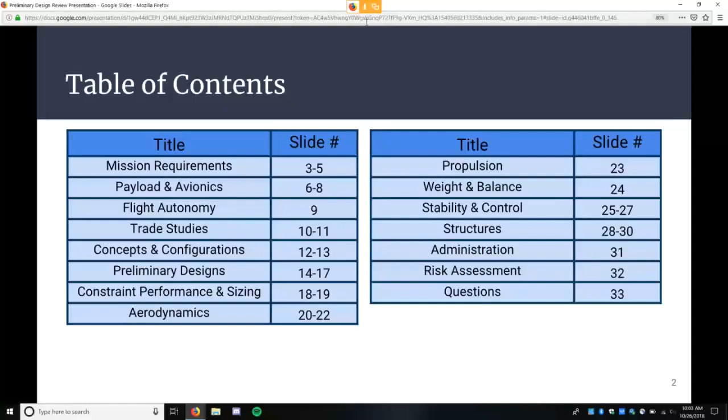Just a quick overview of our mission again. We are going to be doing air quality testing.

Our primary stakeholder is the Department of Ecology for the state of Washington. They want us to be collecting data on carbon monoxide, nitrogen dioxide, ozone, sulfur dioxide, and particle pollution in the boundary layer, which is between 300 and 3,000 feet.

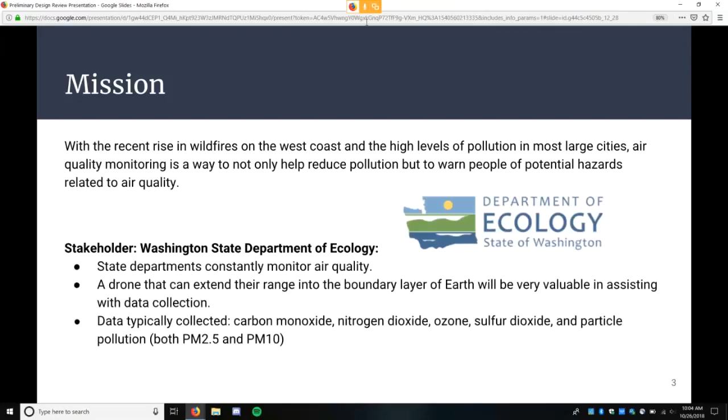Some concerns from last time that we need to address: more information was wanted on payload, range, altitude, and sizing for our drone. All these specific values will be addressed in the rest of the presentation.

Our budget has been elaborated on to cover the entire project instead of just our payload. Our Gantt chart was said to not have enough information, so we've added multiple steps such as modeling, prototype, and testing.

There were questions as to why we chose certain values for speed and range, and those will also be addressed in this presentation. It was recommended that we create a section for safety engineering.

While we don't have a specific person appointed to this role, each person on the team has safety in mind with their designs. For example, some configurations we've been exploring we have chosen not to do from a safety standpoint. We were also questioned as to why we weren't doing autonomous takeoff and landing, and I'm sorry if we did not make this clear, but we do plan on doing that.

So, finalized design requirements: we will be collecting the main data that the Department of Ecology wants, which is carbon monoxide, ozone, and PM2.5, which is particulate matter under 2.5 microns.

They want this data between 300 and 3,000 feet above the ground, so we will have a hand-launched takeoff, a flight time of 1 hour, 2,500 feet with a max ceiling of 3,000, and a belly landing.

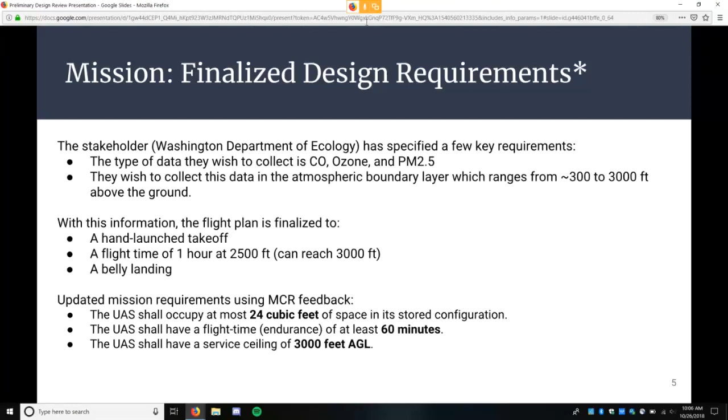A few driving requirements are obviously the hour flight time and 3,000 feet, but also the UAS shall only occupy 24 cubic feet. Right now it only occupies about 17.2 cubic feet with our design, so we are doing well in that aspect.

Our payload, this is our standard flight control stuff here with Pixhawk, pitot tube, GPS, telemetry information to transmit our data, and servos. Right now the cost of this is about a little under $600 with a weight of 90 grams.

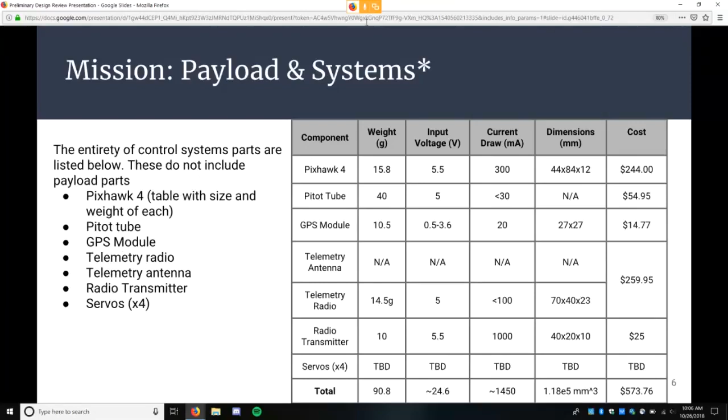We expect this weight to increase a little bit due to the servos not being chosen yet, because we cannot choose those until we have our control surfaces completely defined, but it will not increase a lot.

Avionics, this will be what we will be using to collect our data. We will have an Arduino Uno with a shield, a carbon monoxide gas sensor, an ozone gas sensor, a PM2.5 air quality sensor, and cables to connect them all.

The weight's going to be about 150 grams, and the cost is a little under $150. This aspect will not change at all.

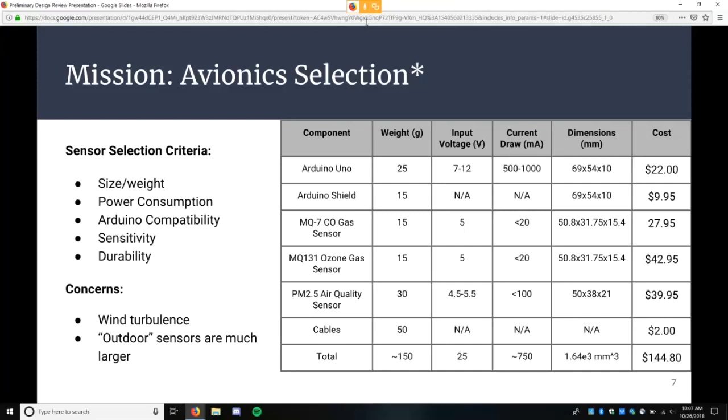The ozone sensor and carbon monoxide sensors are attached via an I2C connection, and the PM2.5 sensor will connect straight into the Arduino. This is just a little diagram of how everything's going to connect together, with some pictures of our sensors and Pixhawk.

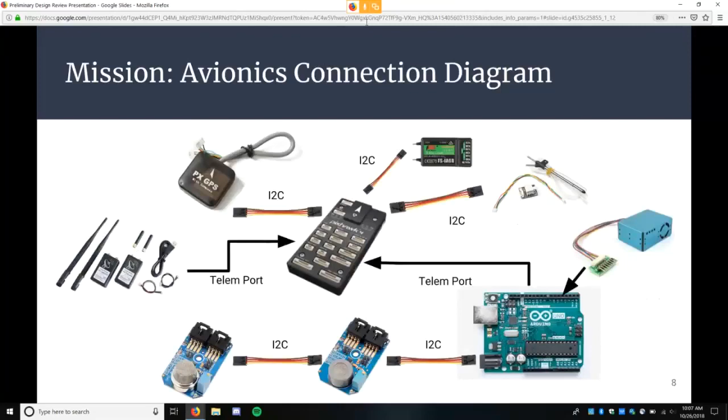We also plan on implementing flight autonomy into this mission. We want to make a flight mode that bases the aircraft's route on the data it collects. So, for example, it will fly in a certain pattern and collect data, and as this data is collected, it will move towards a higher or lower concentration of ozone, PM2.5, or carbon monoxide.

This will really help with data collection for our stakeholder for events such as the wildfire events that happened this past summer. So that was a big point for them—they really want to be able to test air from the smoke coming from that.

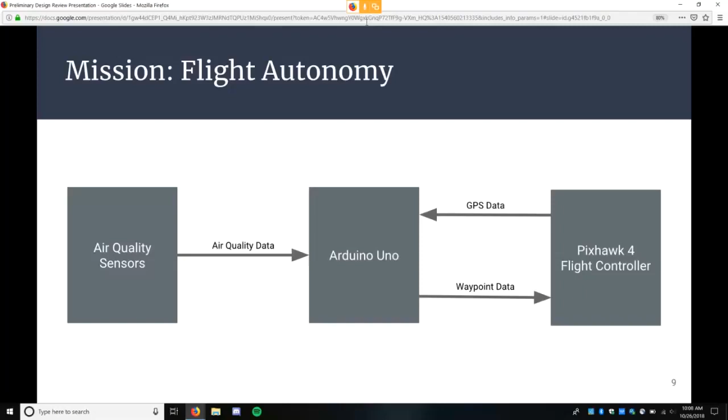Good morning, everyone. My name is Will Reithman, and I'm talking from Clemson University. I am the CAD and manufacturing lead for our team.

The way we did this, each parameter was increased while holding the remainders constant, and then we determined the effects that occurred from that change to ultimately size our aircraft correctly. The goal here was to find the parameter that had the biggest impact on the aircraft size, and then to optimize those parameters.

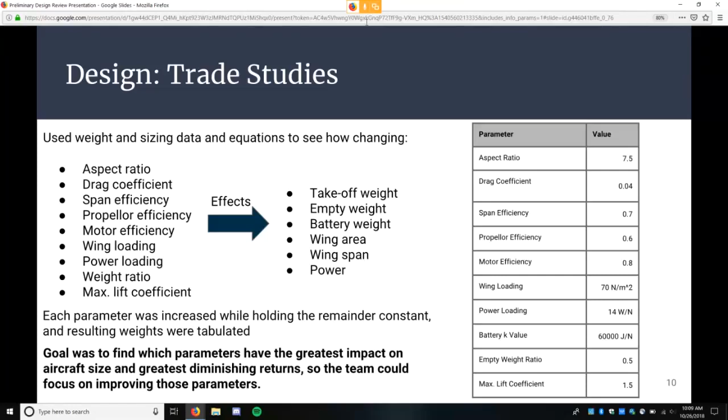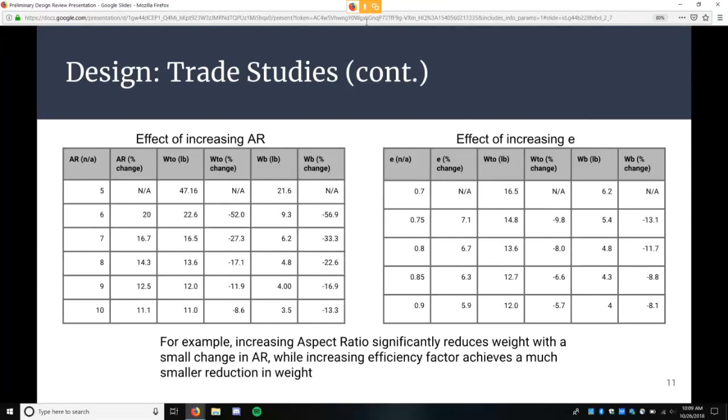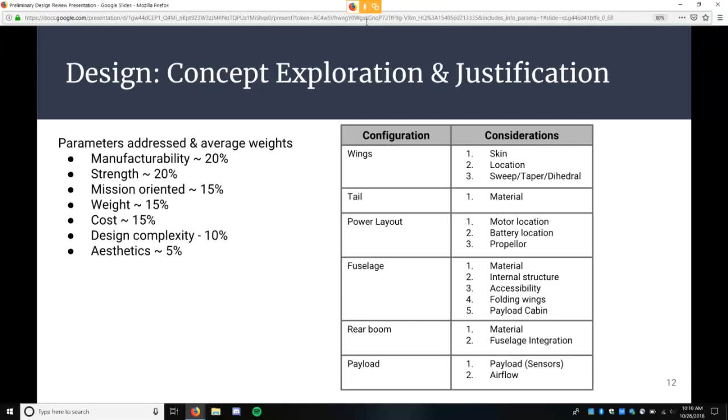So the team started exploring different possible configurations of the UAV in order to find the feasible configurations. The main parameters that we used to assess these concepts were weighted in order to determine which parameters took precedence over the others. These parameters and their average weights are shown on the left here, and then the different configurations and the considerations that we went through are shown on the table on the right here.

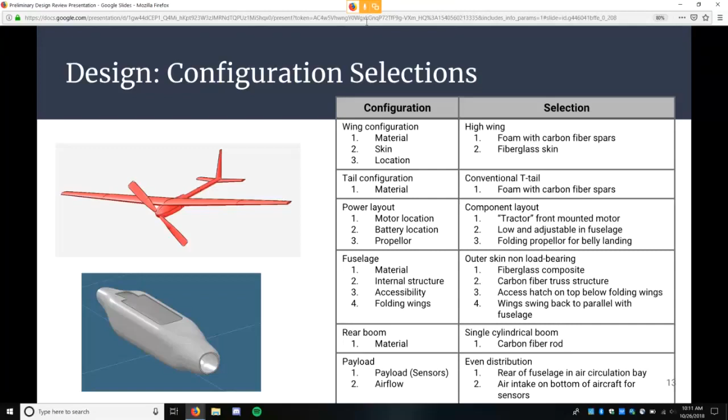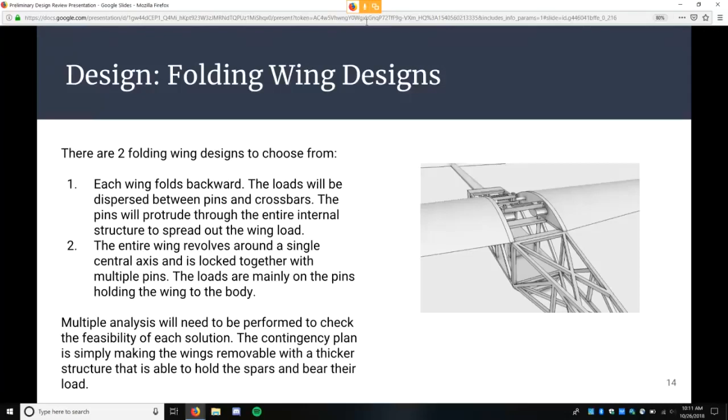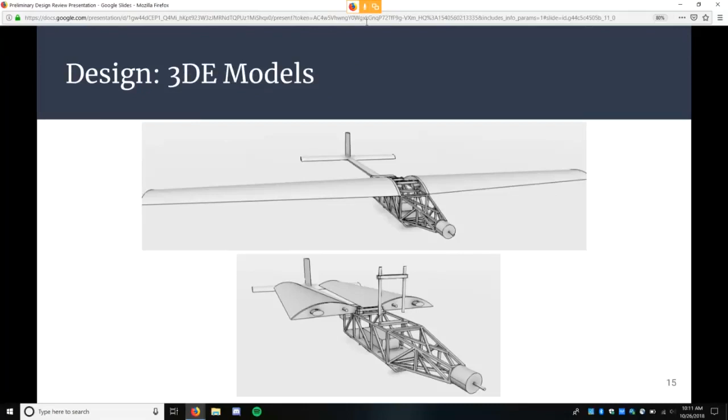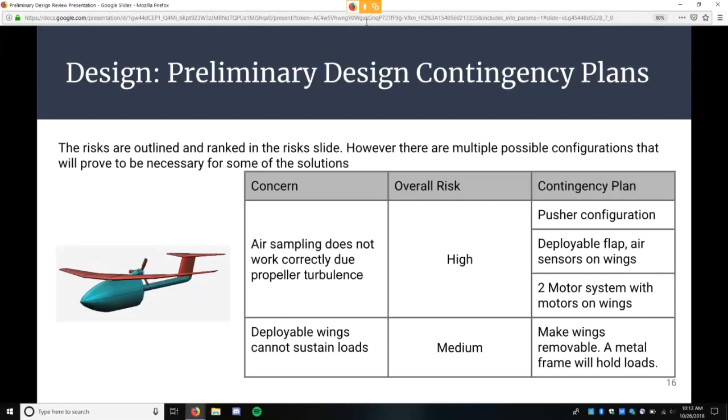So for our initial constraint, performance and sizing, we had an initial weight estimate, a takeoff weight of 13 pounds. And we were able to update this estimate once we found our finalized wing size, the materials that we were going to use, the volume of our structure and fuselage, the propulsion components, and the controls weight. So we have a new improved weight estimate of a takeoff weight of 10.72 pounds.

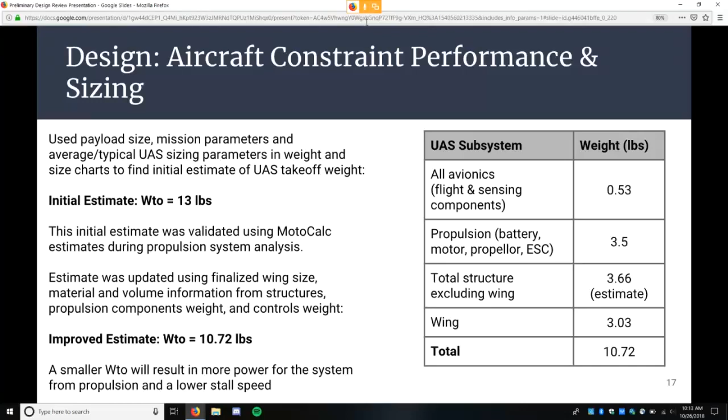And this lower weight will result in more power for the system from propulsion as well as a lower stall speed. And the table on the right here shows the different subsystems and their corresponding weights, with the largest being the battery, the total structure, and then the wings, which will add up to the total weight of 10.72 pounds.

Here's just our preliminary flight envelope for our aircraft. We will definitely need to do more testing with this as our design becomes finalized, but this is what we have right now.

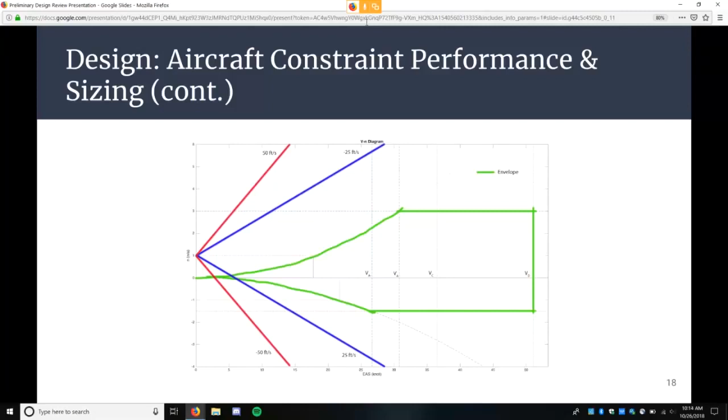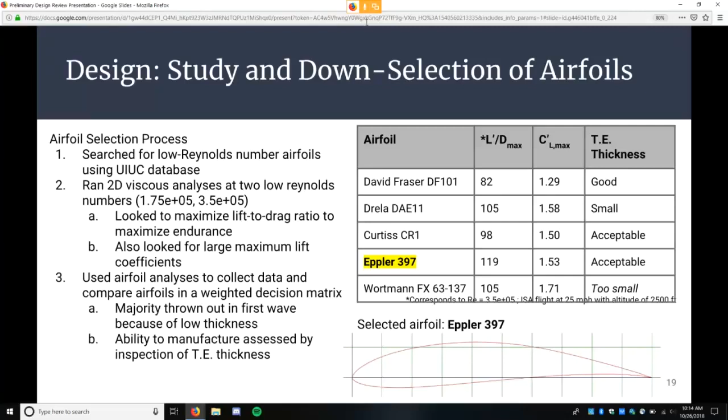We're going to talk about our selection of airfoils now. We had about 8 airfoils that we chose because they all had low Reynolds numbers, which is going to help us increase our flight time. And from those 8, we threw them in a decision matrix. And the main thing we were looking at was lift to drag ratio, and we picked the Eppler 397 because it has the highest lift to drag and also pretty high CL max and acceptable thickness for manufacturing. So in the bottom right corner, you can see a picture of this airfoil that we've chosen.

And the sizing of the wing was determined based on an assumed 13-pound weight of the aircraft, which we've now shown that it's probably going to be lower than that. And we picked a span of 7.5 feet with a chord of 1 foot to help us achieve that 7.5 aspect ratio we talked about. And moving forward, we've got some further analysis to do, but this is our general wing sizing that we want to go with.

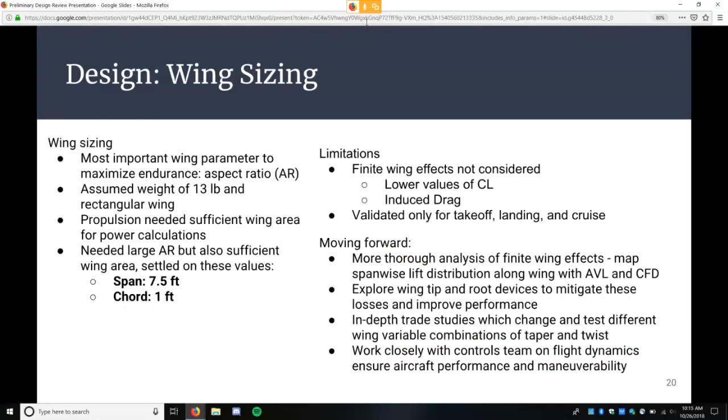As for the tail airfoil, we had to choose that as well, and we wanted it to be similar thickness and chord to our wing airfoil. So we went with the NACA 0012 airfoil, which has 12% thickness at 30% chord. There's the picture of it. And this is pretty similar to our thickness and chord of the Eppler 397, which we chose for the wing.

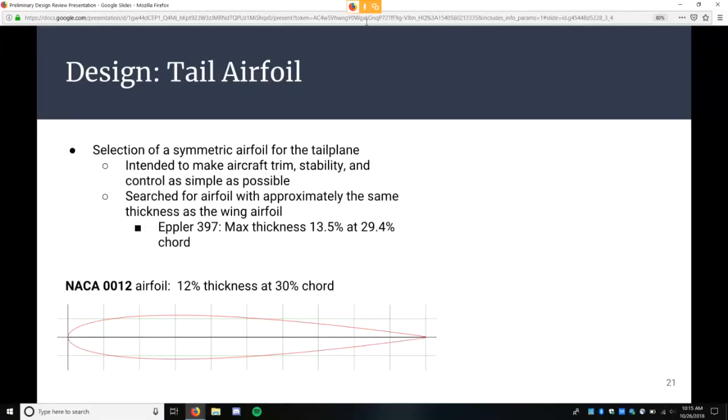Onto the propulsion system we will be using, we kind of designed this from top down, starting with our constraint of a long flight time. So we initially chose just a high capacity battery at 16,000 milliamp hours, 15 volts, and kind of worked down from there. That ended up being our final choice.

But a lot of trade studies were done between propulsion and the aerodynamics team with different airfoils, different battery and motor combinations to see which one worked the best. And this is the one that we ended up choosing. As you can see there, it's pretty heavy as expected, 3.5 pounds, and with a price of $350.

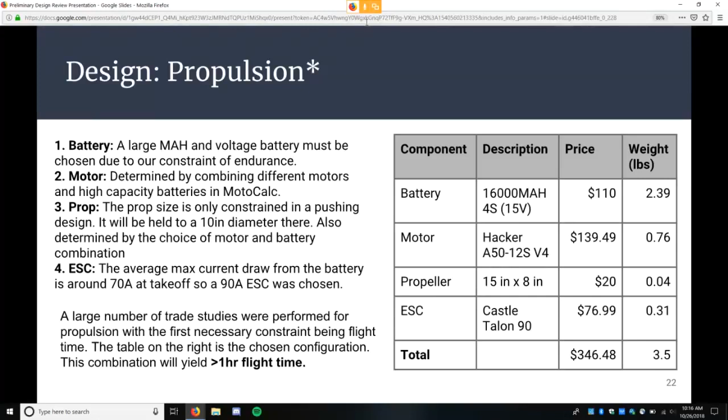So under our weight and balance of the aircraft, we split our aircraft into a few components. We've got the motor, the fuselage, the wing, and the tail. And we mapped out the center of gravity from the tip of the motor in inches and put it in this graph where the circles show relative weight. So a bigger circle is more weight. You can see the weight on the right side with an overall weight of 10.72 pounds. And this puts our center of gravity of the overall aircraft at 16 inches from the tip of the motor.

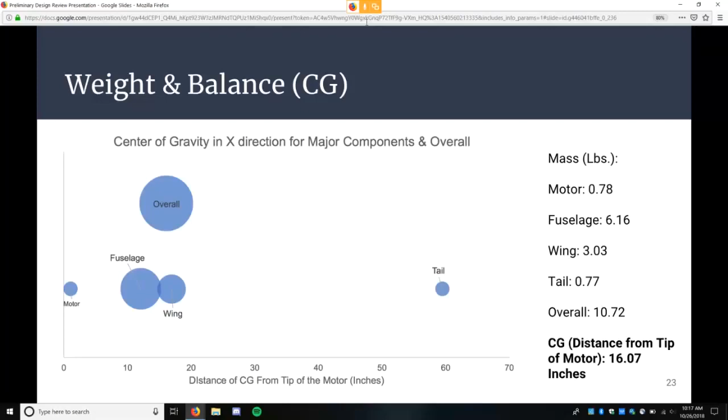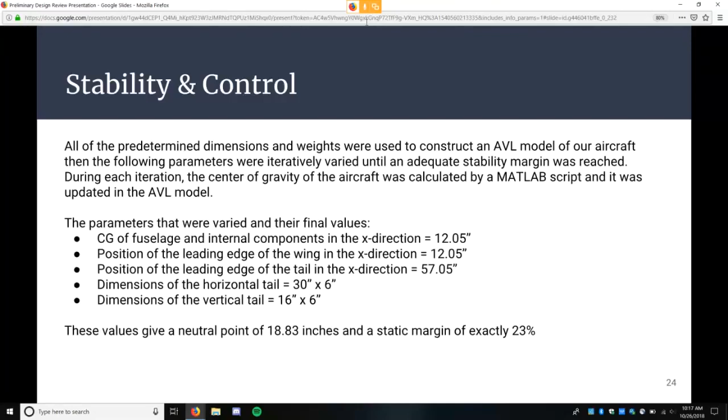So for the stability and control part, we had to pick multiple parameters, such as the position of the leading edge of the wing, the position of the leading edge of the tail, and the size of the tails. And what we did is we kind of matched these up. We put the leading edge of the wing at the same position as the center of gravity of the fuselage with its internal components, and we kept moving back or changing these parameters until we had a center of gravity that was in front of the neutral point, which gave us a static margin of 23% when our neutral point was 18.8 inches from the tip of the motor.

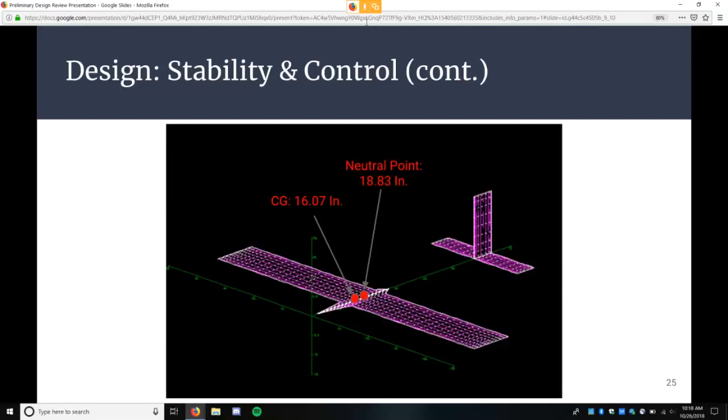So here's a schematic showing our aircraft with the center of gravity slightly in front of the neutral point. And moving forward, we're probably going to want to bring the center of gravity back to about 60 or 70% of the chord length, which will increase our stability. We can do this with our configuration because we've built it to add in extra space. We have 3 to 4 inches that we can move the battery forward or aft, which will adjust our center of gravity a lot because that's the heaviest component that we have.

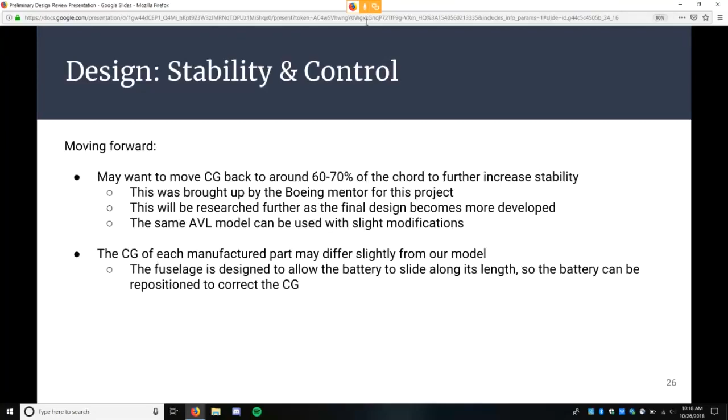So for control surfaces, we've got 2 ailerons, 1 on each wing. We've got a rudder on the tail and an elevator on the tail, and these should give us all that we need to control our aircraft adequately.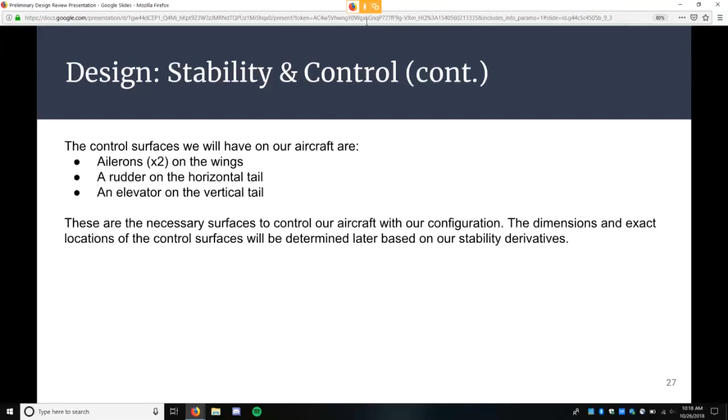So our internal structure design here is going to be a truss structure. It's going to be from carbon fiber, most likely laser cut from carbon fiber sheets of about 5 millimeter thickness. We're going to bond these different pieces together with 3M epoxy as well as tongue and groove joints. And then in the areas of higher loading, we'll likely use hardware. These areas would be where the wings interface with the fuselage as well as the rear boom. We're looking to use carbon fiber wing spars as well as a carbon fiber rear boom.

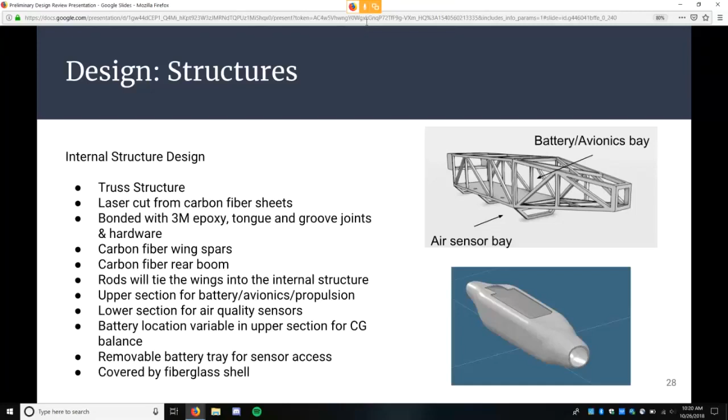And then that bottom battery tray is going to be removable, likely with the air sensors adhered to the bottom of it, so that we can remove that and we can make any changes to those air sensors if necessary. And then this entire internal structure will be covered with a fiberglass shell, and a rough drawing of the fuselage is shown in the bottom right here.

And so our mission is centered around air quality data collection. So we want to make sure that the data that we're receiving is good. And so what we're going to do here is we're going to have an air duct in the front of the fuselage and then an exhaust in the rear of the fuselage at the bottom there on the right.

And we're going to 3D print ducts to expand the flow of air as it comes into the fuselage, and this will help slow down the air so that our sensors can get good readings. And then, as spoken on in the last slide, that battery tray will be removable with the sensors adhered to the bottom of it so that we can test those sensors and make any changes necessary there.

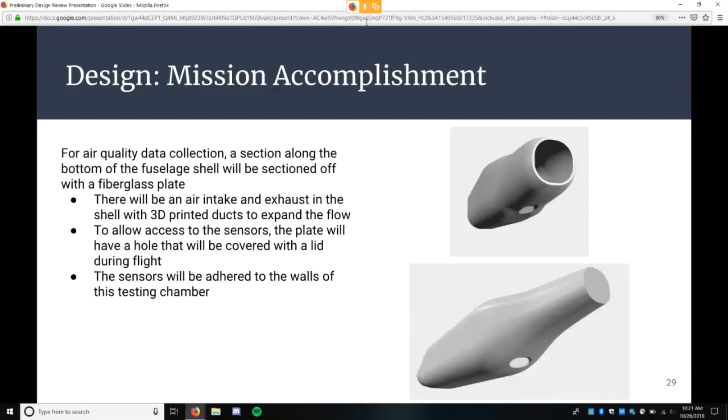There are only a few points on there, such as final flight testing, initial flight testing, finalized drawings, and construction, because we aren't really sure the issues we are going to run into there, but the schedule will be able to be updated as we move forward.

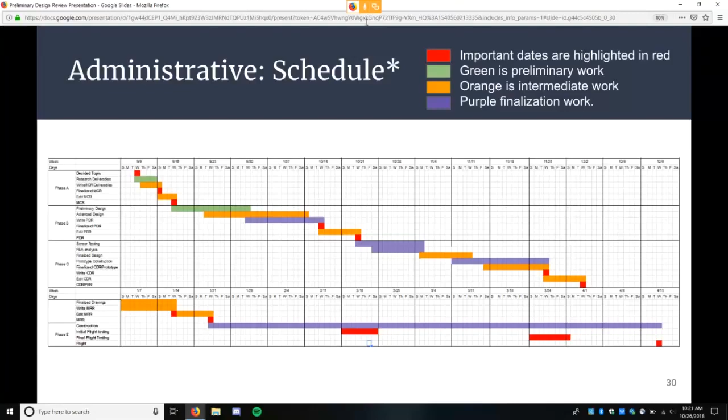And on to our overview of our budget, we've got a total budget of $4,750. That's what we're estimating everything will cost. This includes a $2,000 structures estimate because we're going to be making a lot of it out of carbon fiber, which is expensive. And then our testing budget is at $1,000, which covers replacing parts that may be damaged during testing. But total, we're way under that $6,000 limit, so we're looking good.

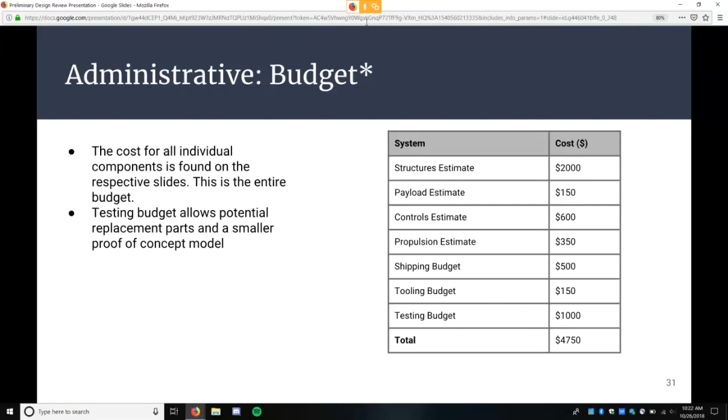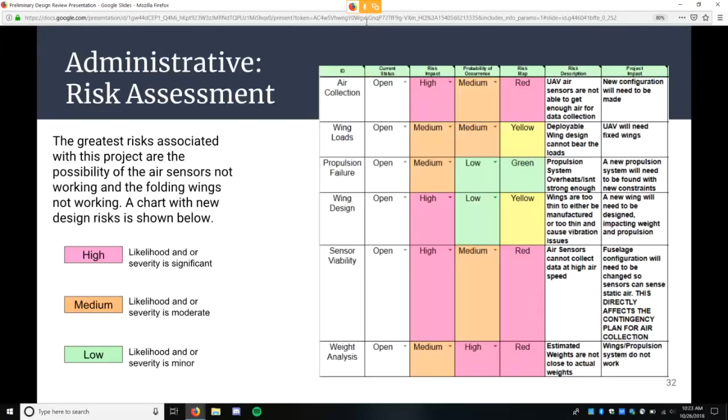And then the other greatest risk we have is that the loads on the folding wings may be too high with the pins that we have planned to put in there. So also our contingency plan with that obviously is to make the wings fully removable, which Will also talked about earlier. So with that, we'd like to take any questions you guys have.

Are there any questions for Team 7? Can you hear me? Hello? Hello. We can hear you. Bronco Luckett speaking from Boeing.

So I'm a little uneasy about the fact that I haven't seen a correlation between the mission and the airplane architecture. I heard some good concerns, and I actually wrote a note about the sensor being somehow obstructed by the propeller turbulence and any fumes that may come out from the electrical motor. So that is definitely a concern, that the sensor, based on the mission, should be exposed in clean air, which somehow drives the configuration, and the propeller-driven configuration at the front of the airplane makes very little sense.

I absolutely agree that the configuration should be reconsidered. That's too great of a risk to proceed with, because the basic mission is jeopardized with the configuration. So I wouldn't even consider that as a risk. I would consider that as a red flag and switch right away to the configuration where the sensors are either in the wing, which kind of makes it complicated because wings need to be detached at some point. I would rather have it in the nose of the fuselage, which leaves the drone to be either pusher-driven or a two-motor configuration, which is probably not needed and too expensive.